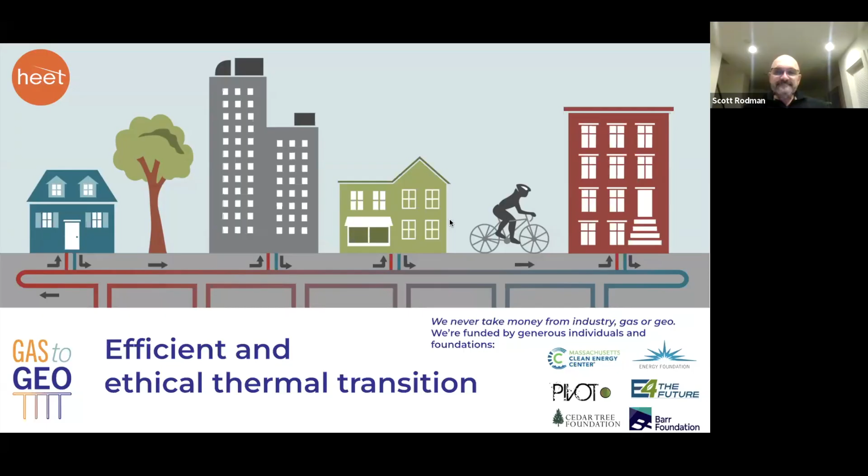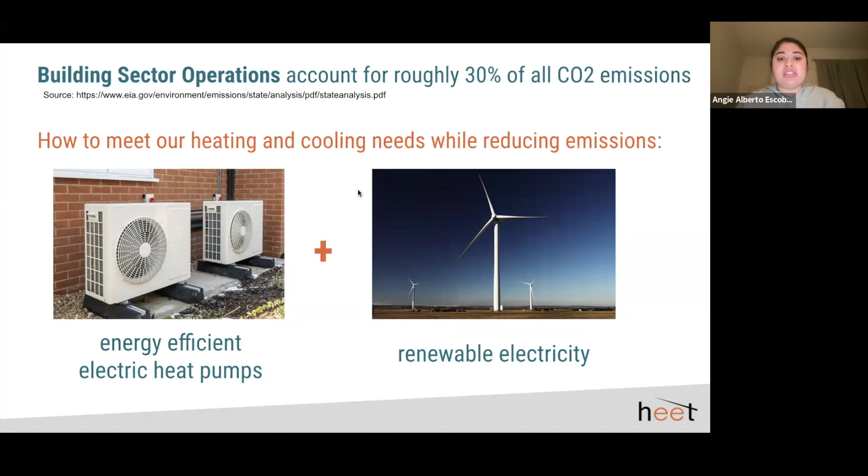So just to set the stage here, it's important to note that our current building stock is a huge source of emissions, and our current strategy for decarbonizing those building sector operations is to meet our heating and cooling needs with electric appliances, and having those electric appliances be supplied by renewable electricity. This is the dominant strategy not just in Massachusetts building electrification or beneficial electrification plans, but even beyond Massachusetts, New York, and other states, you see this as a dominant strategy.

So it begs the question, at least for HEET, what effect will this electrification have on our electric grid and on electric peaks in particular, which drive the cost of energy? So today we have a summer peak when most people's electric air conditioning appliances come on. But what will the peak look like when we shift our currently fossil fuel powered heating systems over to electricity? And so that's the question that HEET started exploring.

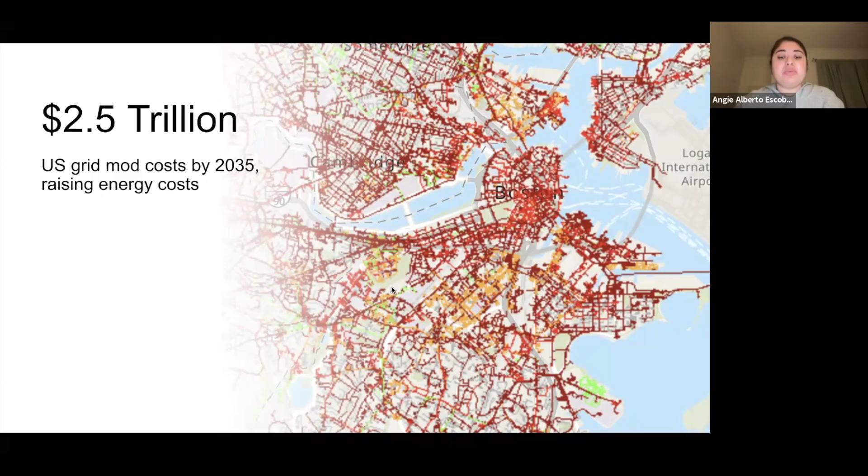This is a staggering number, $2.5 trillion in the next 10 years just to upgrade or modernize our grid in the US. This reflects back in ratepayer energy bills, right? Like we are funding these investments in the electric grid. And so we see this as a staggering societal problem, the amount of investment required in order to meet folks' energy needs and what that will mean for people's everyday affordability, energy affordability.

This report was published in December of 2023 by Oak Ridge National Lab. It showed that compared to the most popular technology for building electrification, air source heat pumps, when you compare a mass deployment strategy of air source heat pumps electrifying a vast majority of our building stock in the US to ground source heat pumps serving the same function, you can actually save not just lots of infrastructure upgrades on our electric system on the transmission and distribution side, but that translates to real cost savings as well.

If you go with a low operational energy technology like a ground source heat pump that has a significantly higher coefficient of performance. So this study showed that it would cost 30% less to decarbonize the grid through individual ground source heat pumps, which is incredible and something to pay attention to.

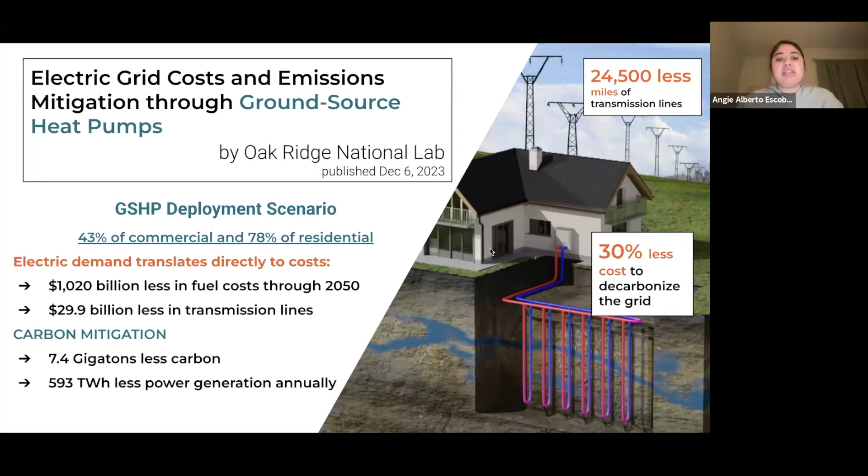HEET commissioned a study to see what if we snapped our fingers and electrified by different technologies, what that would do to our electric peak. And we call this the Falcon curve. When the wings of the Falcon are really high up, that means that the peak is incredibly high. That's the amount of electric grid infrastructure investments we would have to make because of that staggering peak that we

have to satisfy. As you see, COP or coefficient of performance, essentially the efficiency of the technology, increases. Air source heat pumps have a COP of 2, ground source heat pumps have a COP of 4. As that COP increases, that peak starts to lower, the wings of the Falcon start to lower. A case study in Colorado gave us a COP for a networked geothermal system, or a networked ground source heat pump system, with a COP around 6.

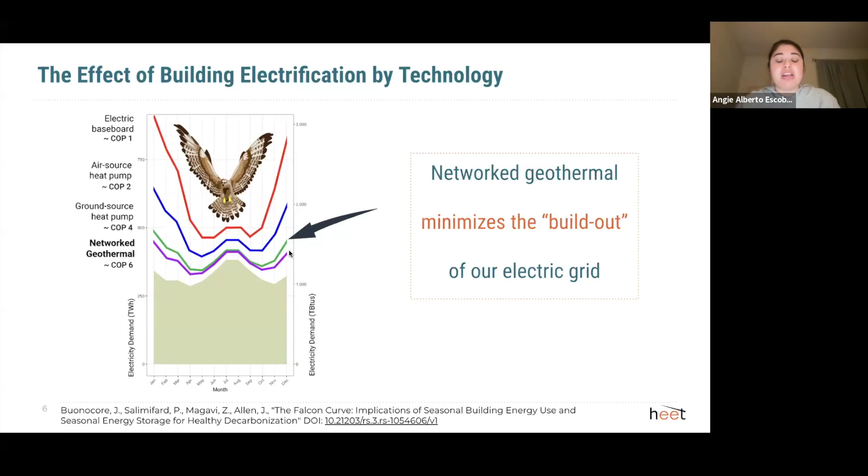And so that could decrease the amount of infrastructure and really minimize the amount of infrastructure that we need to build if this were the dominant technology being used to electrify our buildings. And so the message I really just want to drive home here is that efficiency of the technologies that we use, especially electric technologies, electric appliances, really does matter. Efficiency matters.

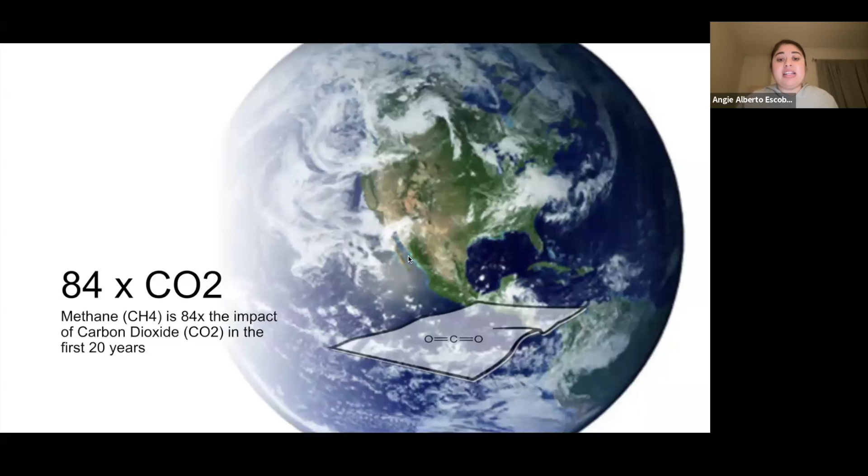So at the same time, related to our work in methane, we and most climate advocates know that methane is an incredibly potent greenhouse gas. And in our state, this is the amount of infrastructure work that is required over the span of 5 years, from 2022 to 2027. This is a snapshot of the infrastructure work due to the leaky, aging gas system that exists in Massachusetts that is frankly just aging. We're aging out our infrastructure, and it's going to cost us by 2050 $1.4 trillion, according to a research economist, Dorie Seavey, that ran the numbers.

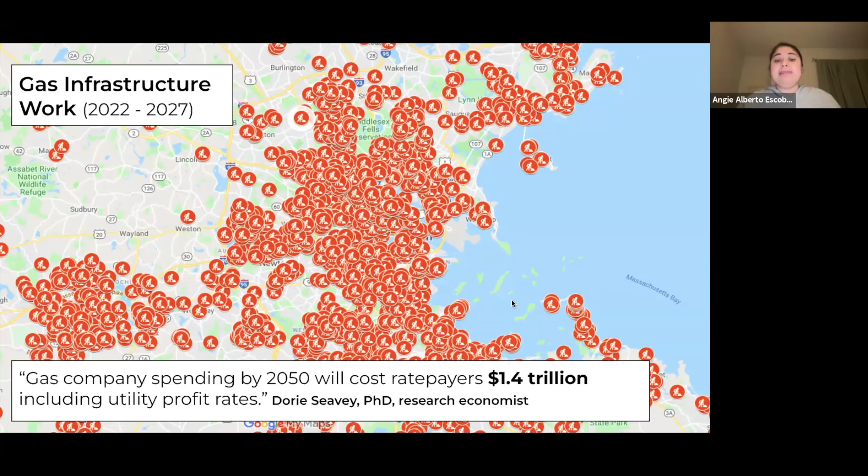And we know that these gas leaks, the biggest, are the ones to target first. And that's some work that we've been doing. You can check out our gas leaks maps on our HEET website. Those are the ones to target first, but really all of these leaks in aggregate are contributing to climate change. And we need to find a way to have plug and play solutions that can wean us off the gas system essentially so that we have less dependence and can minimize gas leaks in the future and minimize the amount of methane in the atmosphere.

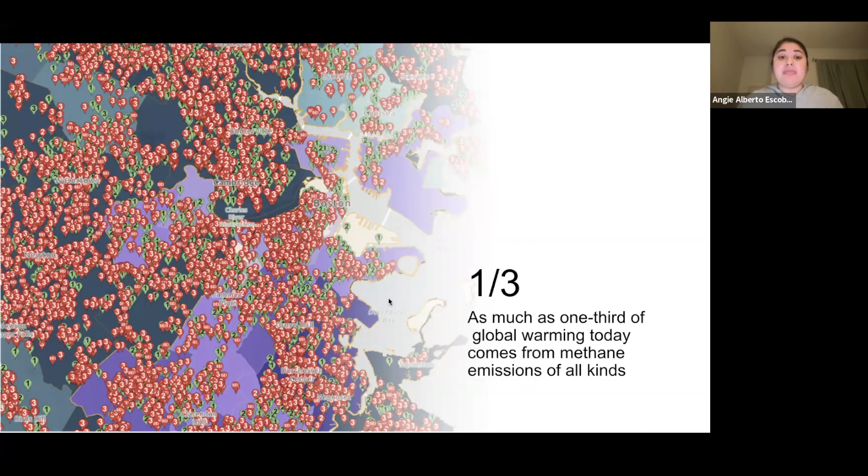We don't know when people are making these decisions. They just are. They decide one day, or their current system ages out and they have to replace it, but there is no coordinated effort necessarily to this electrification. It's really a house by house approach.

And the challenge here is who is left on the gas system with a decreasing rate base are likely folks that are renters and don't have a say on what type of heating system they have in their home, or are low-income folks that just have to go with the cheapest option, or maybe just aren't informed about the options that exist for retrofitting a home to be electrified. So this is really a big challenge in our energy transition, ensuring that as we're transitioning it is equitable and we're not leaving folks behind in what we call the last grandma problem.

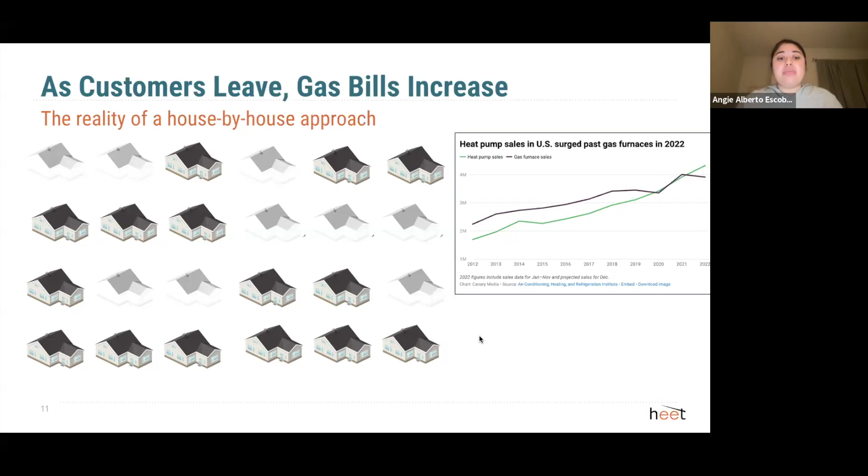So through these challenges that we've mapped out, HEET engaged with many stakeholders on the challenges and came up with this possible solution. What if we use the right of way that the gas system currently has, use the expertise of laying pipe in the street, and simply change the energy transfer medium from gas to water. And so a geothermal network is very similar to the gas system. It has a distribution pipe that runs down the right of way of the street, and service lines that go to each building.

And kind of like the gas system, where you have a gas furnace in your home, you would have a heat pump in your home that is supplied the water from this distribution loop. And so this is what we call a geothermal network. It's a solution that came together over many charrettes, what we call community charrettes or stakeholder meetings, to help find a solution or a technology that can multi-solve for many of these societal problems that we're seeing.

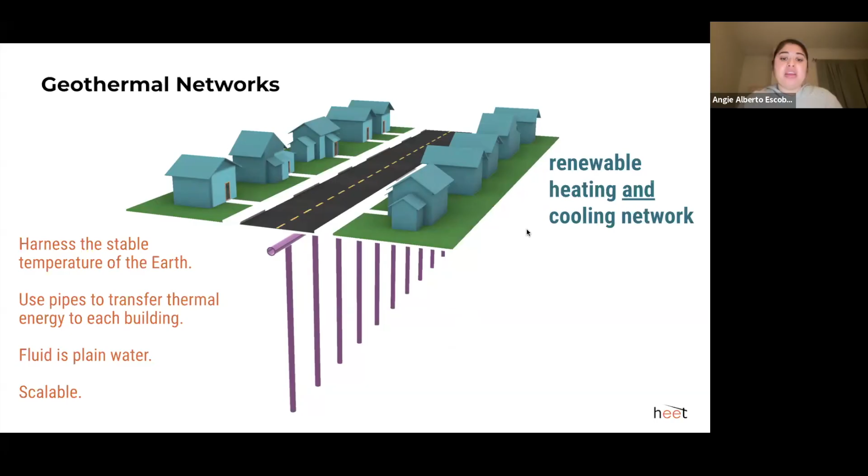And this system would provide renewable heating and cooling and require a minimal amount of electricity. And so what HEET has proposed is, in order to maintain a stable rate base and not leave folks behind,

what if a gas utility, with the expertise of putting pipe in the street, managing thermal energy, having that customer relationship already, that billing relationship with customers, and that long-standing trust of being able to supply them with their energy needs? What if those utilities were to install these systems and provide renewable thermal across an entire neighborhood at a time, no matter the income level or whether they're renters or owners of the homes, but just provide thermal service down a cul-de-sac, let's say.

So I wanted to clarify, when I say geothermal network, that folks aren't thinking of other geothermal technologies, because this is a very common misconception. We're not talking about a deep geo district that uses hot water, brings it up to a central plant, and then distributes the appropriate temperature around a hot water loop. That is very common in Europe, Scandinavia, in places where they have really high heating loads. This makes a lot of sense, but there are a lot of efficiency losses all along the system

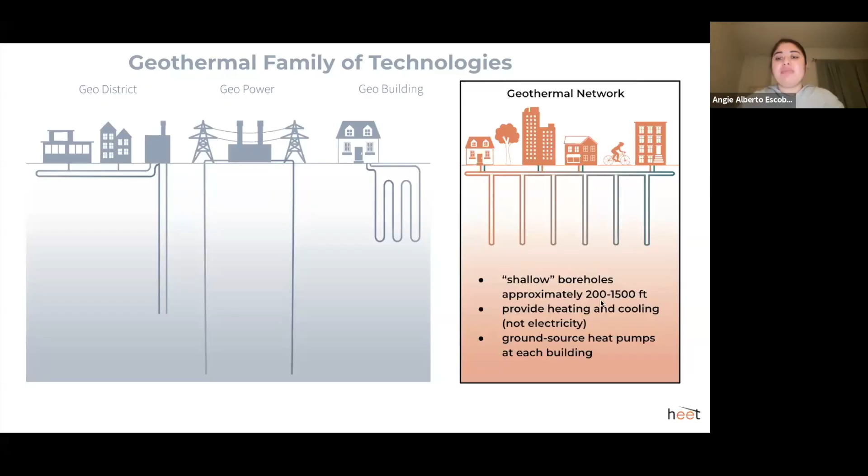So this is considered shallow geothermal. Around 1,500 feet is really the deepest that you'll go for a geothermal exchange system like this. And this does not provide electricity. Actually, you're using electricity at the building level, but it's highly efficient, and I'll tell you a little bit why. So this shared loop, people sometimes ask why even install this shared loop? Why not just do individual geothermal? Well, there's some interesting properties when you put in this shared loop that make the economics worth it.

When you target a location that has mixed energy use, there might be a building that, even in the winter, because of its occupancy and, say, machines in the building, might actually still need to be cooled, and the ambient temperature loop can harness the waste heat from the heat pump. Essentially, as the heat pump is cooling the building, it is pulling the heat out of the building and can place that heat into this ambient temperature loop, this shared loop.

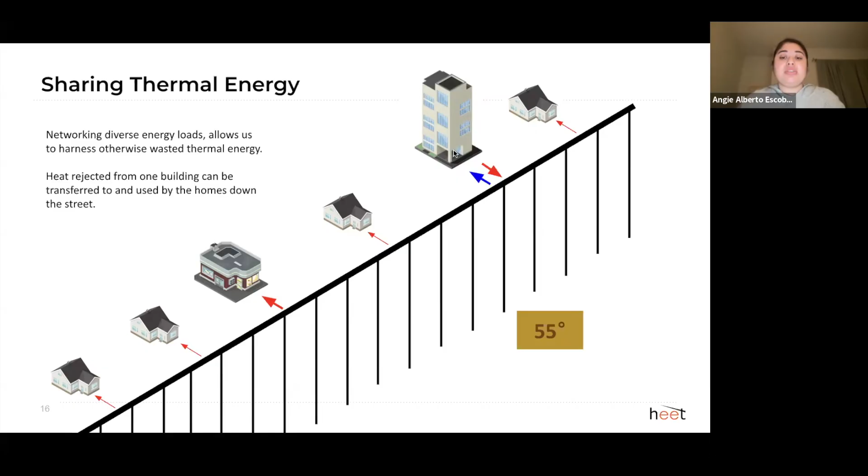That shared loop that also has service lines to other buildings can now supply that warmer temperature that's likely closer to the temperature that these buildings in the winter might want for their homes or their spaces, making the heat pump just work a lot more efficiently, minimizing the cost of energy for the folks on the loop. And if these folks were compensated for that waste heat, they could also be benefiting from this as well.

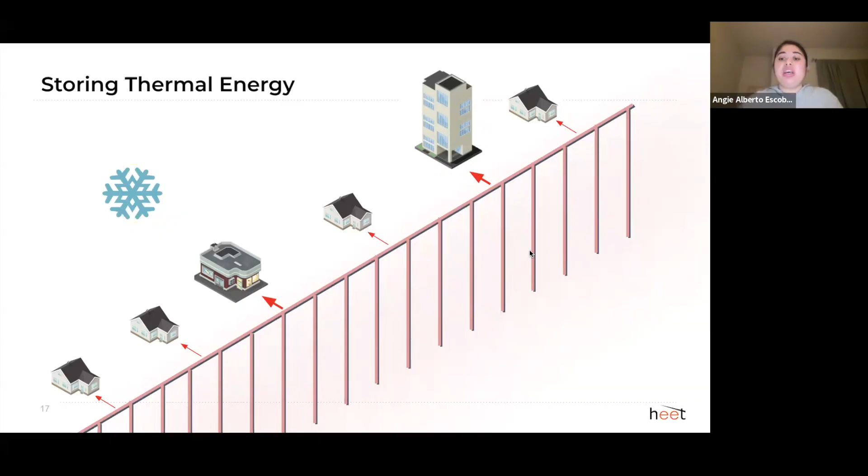With geothermal bores, these kind of vertical loops that are pictured here, in Massachusetts we have great bedrock, which holds a lot of heat. And so we can actually store thermal energy across seasons as well. Say in the summer, we can dump our heat into the ground and pull it out in the winter. This is true over an annual scale, but it's also true over smaller time scales, which can allow you to store energy across the year as well. Think of the shoulder seasons.

So really, HEET has been exploring this technology and now advocating for it because of its ability to multi-solve: meeting our emissions reduction targets on a neighborhood scale or block by block basis rather than a house by house basis, increasing the speed at which we're able to meet these targets, but also because of the amazing electric grid impact of ground source heat pumps, as we saw with the Oak Ridge National Lab study. It's a great plug and play solution for avoiding investments in natural gas pipelines because they can deliver the exact same thermal service, but can now supply an additional thermal service, cooling, in the summer as well, expanding the business model of the existing gas utility.

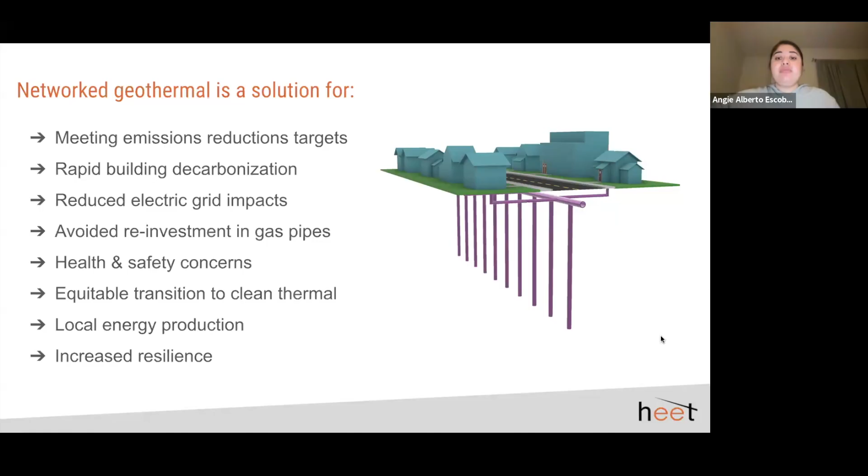Obviously, by reducing combustion in the homes, health and safety could increase with the decommissioning of gas, and for the reasons of equity that I mentioned. It's also local energy production, right? It's hyper local. You have the bores or your local thermal sources right around your neighborhood. That's the idea, harnessing what is around us already for increased resilience so that we're not depending on fuel that's being shipped from far away.

And so I want to mention that this is kind of the progress to date. There's a lot of utility interest across the nation. There is a quarterly utility network geothermal collaborative that meets to explore the topic that we're active participants in.

And the reason really that drove us towards the gas utility, besides obviously needing to solve for the gas system issue in Massachusetts, is because of an additional equity concern, which is a just transition for the gas workers currently. They are necessary, they are vital to steward us away from the gas system. There's so much institutional knowledge within the gas workforce that are actually out there repairing pipe, putting pipe down, that will be necessary in order to steward us into a clean energy future.

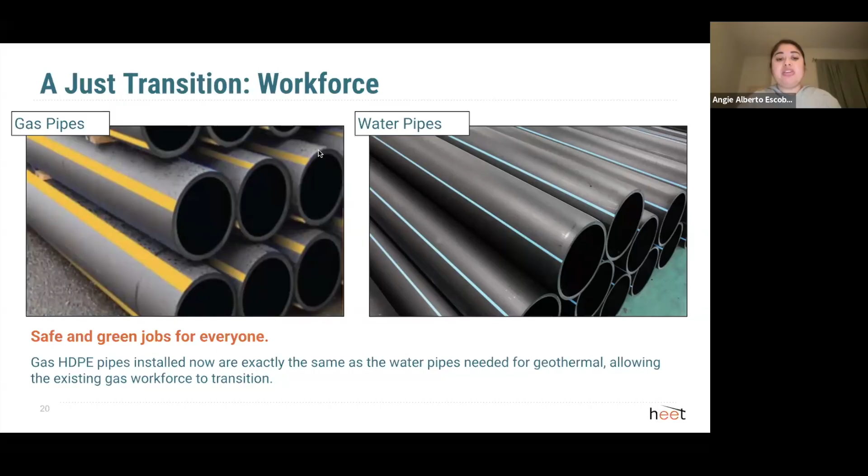And so being able to have a technology that can harness all of those skills, the pipes that are put in for geothermal systems today are made out of HDPE, which is a material that is already used in the gas workforce today when they're repairing new pipe, putting new pipe in. They're usually using HDPE. So in the Framingham, Massachusetts pilot that happened recently, here's some photos from that.

It was actually the gas workforce that was putting in that geothermal pipe. It was the same foreman that was, a week before, working on a gas project. He was working on a geo project the following week. So it's pretty interesting how seamless it was in this pilot, the workforce transition piece.

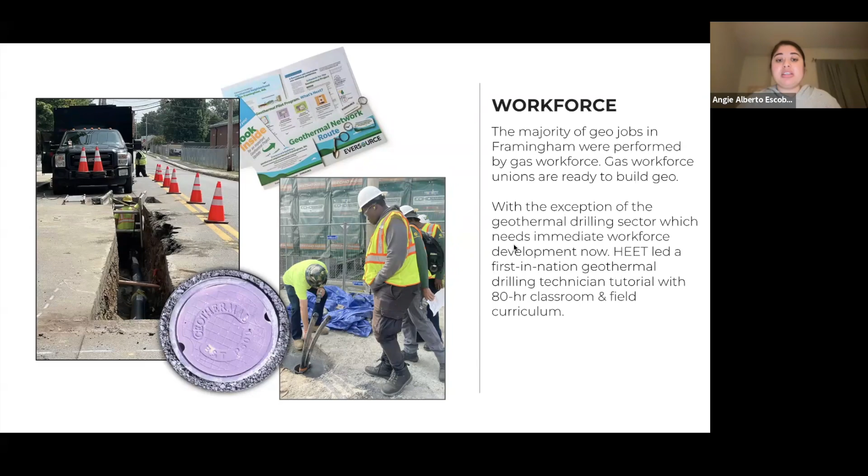And really, HEET's work today lies in building out a project pipeline. So we've worked at the legislative level and are working within the regulatory space in Massachusetts and nationally, really, to set the enabling conditions for gas utilities to be able to do this work, decarbonize their business model on this large scale. But also, my organization recognizes that we need to set enabling conditions at the local level as well.

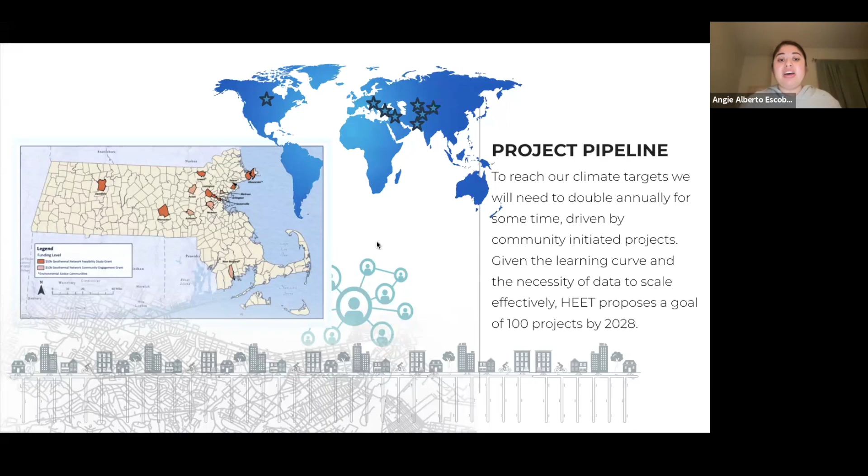And so here is a quick snapshot of a set of communities in the Commonwealth that received small amounts of funding but lots of technical assistance from HEET in order to advance their exploration of this technology for their communities. And so, really, the goals here were to build visibility and inform siting in those locales, inform future siting. So, what does that mean?

It means a lot of stakeholder assessments, really putting our ear to the ground to what people think about geothermal, informing them, educating them about the potential benefits if they were to be a participant of a loop, etc. But also unlocking the local data that exists at the local level already.

There are already many neighborhood scale electrification pilots going on where people are being encouraged to decarbonize now. And that includes maybe their gas stove, setting them up for success by upgrading their electric panels or doing weatherization early on. So we really wanted to share that information back to the state in a centralized way. And so collecting that information from those places, we've been able to share that now with folks on our website, which I'll get to in a second. But really, the idea is to inform utility and regulation policy that is being crafted really as we speak.

So here's an overview again of the awardees. We really kept it very broad in terms of who could apply. We wanted a diversity of applications, meaning the actual applications of the technology, who the end users would be. So we had life sciences buildings, a rural municipal campus out in Western Mass, affordable housing buildings, and an industrial campus even that did a feasibility study.

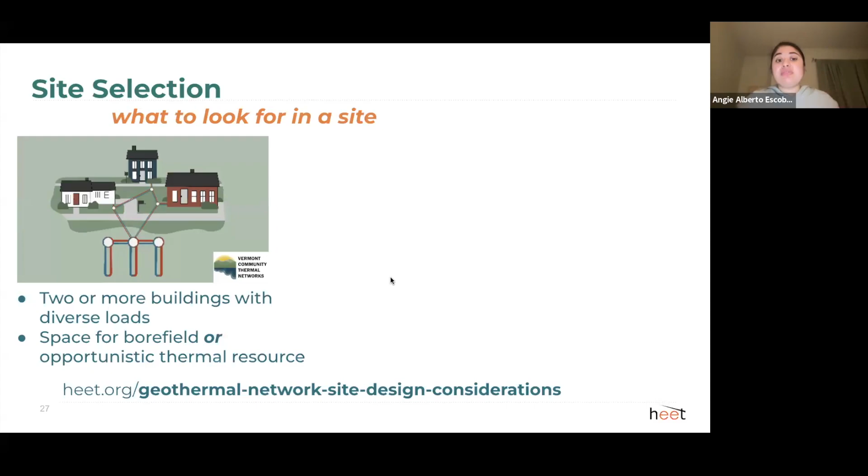So for anyone here that wants to think through what to look for in their community, I wanted to just share quickly one of the resources that we have in our HEET toolkit, which can be found on our website. Let me just go back really quick and just highlight where it says learn more here, heet.org/gas-to-geo-transition will take you to a toolkit with a number of resources, one of which is kind of a site selection criteria, if you will, a quick checklist of what you want to look for in a site.

One of the first things that we talk about to communities is you really want to harness any opportunistic thermal resources if you have them nearby. What does this mean? Any buildings or facilities that might have a lot of waste heat that can be harnessed by a networked geothermal system or a geothermal network. So think ice rinks, hospitals, breweries, even a data center can be used to heat some other buildings if it's close enough in proximity. And really, what you want in a site is density. You want diversity and density.

And so, a lot of folks are interested in doing rural applications. It can be done, it will look a little bit differently. The economics really work best when you have urban density and some good load diversity, meaning that you have commercial buildings and also residential buildings all in the same place.

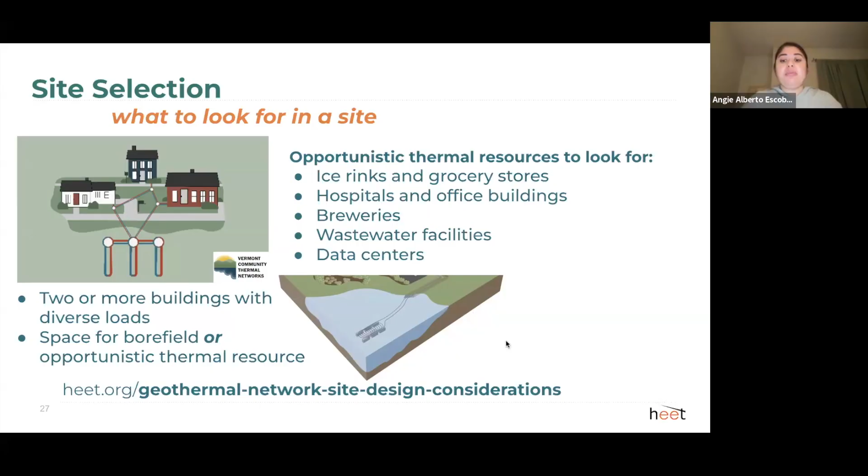Or target a neighborhood that already has gas constraints, and the economics will look good in comparison to the current energy rates that people are paying, to ensure that people's energy burdens go down, or any high energy cost neighborhood that could be places with electric resistance heating or even oil-fired furnaces as well, or even targeting a section of leak-prone pipe to decommission if possible.

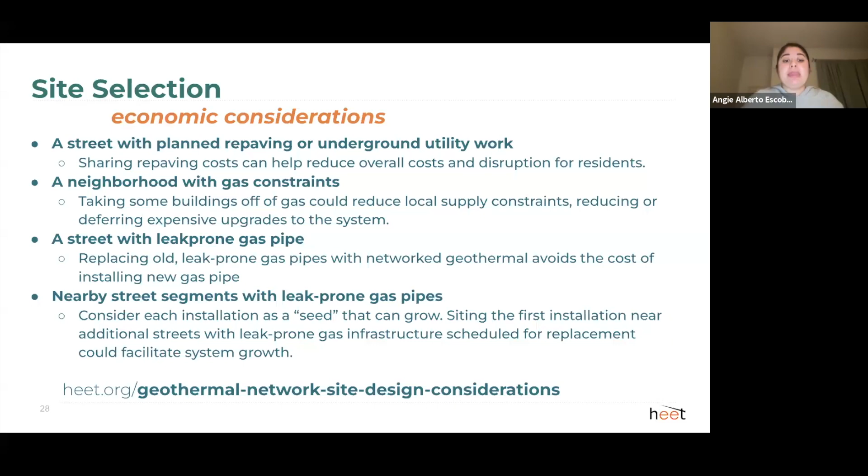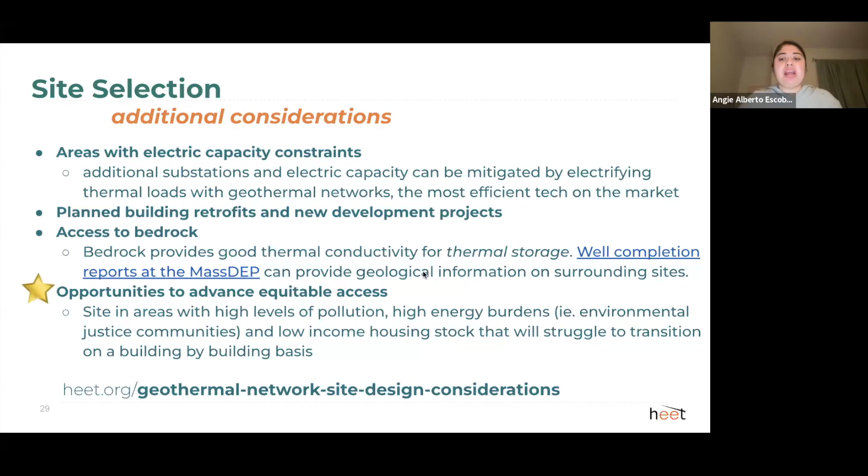I mentioned the electric resistance heating as a good opportunity to target. This is especially great if there are already electric capacity constraints in that area. You could free up some electric capacity by moving from a low COP technology to a high COP technology like a geothermal network. There are also additional resources and considerations, but happy to move forward here and just share

this opportunity. The Mass DEP currently has a wastewater energy recovery pilot grant program out. They are accepting applications on a rolling basis, essentially until they run out. And just wanted to share the opportunity because it is a unique opportunity that we're seeing right now that has multiple tiers of funding for this type of work.

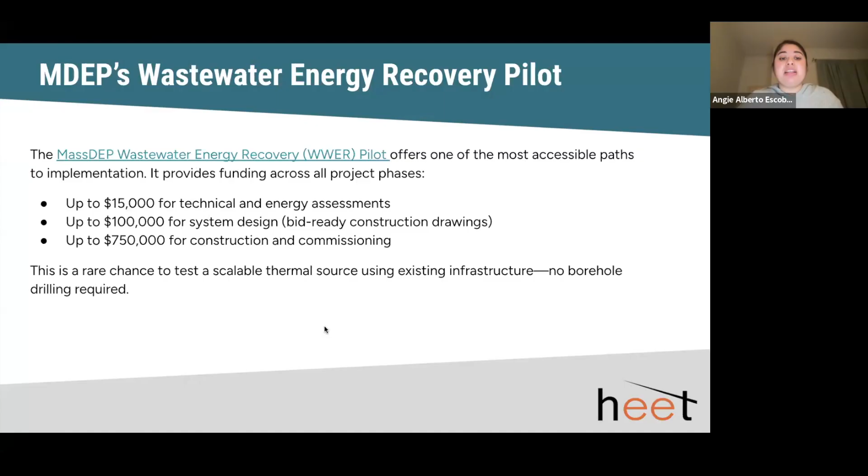Wastewater energy is a great opportunistic thermal resource. You're recovering energy with a minimal amount of energy from an already existing waste stream, and you're able to lower the capital cost of a project when compared to geothermal boreholes because of the high cost of drilling. So this is a great program to go for if this is something that is of interest, and HEET is happy to support any applications that folks are interested in going after.

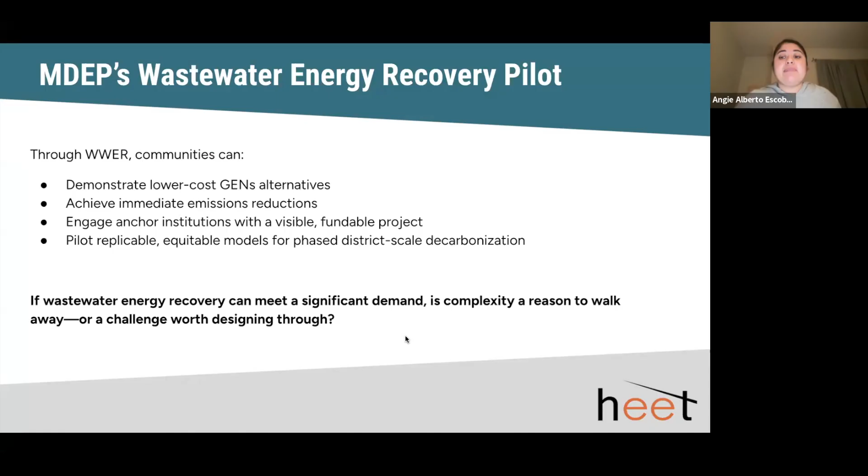So I will pause there and just say again that there are plenty of resources and many branches that we could go off into in conversation. I really welcome each and every one of you on the call today to reach out to me if you're interested in championing this technology in your community.

Thanks, Angie. That was a big help. We have a couple of questions, but I'm going to start off with a couple of things here. There's been a lot of question about geothermal versus ground source heat pump and understanding the wording there. Can you just take a minute on that? I think that's been asked by a couple people.

Yeah, sure. So, geothermal is like the last name of a family of technologies, all the technologies that I showed, right? And a ground source heat pump really refers to the appliance itself. The ground source heat pump is an appliance that is connected to some sort of closed loop water system that transfers energy into the home through a heat exchanger.

And that ground source heat pump can be connected to various types of distribution systems, like a hydronic system in the home for heating or a forced air system. So that would be called a water to water or water to air, respectively. So that is how I would describe the difference.